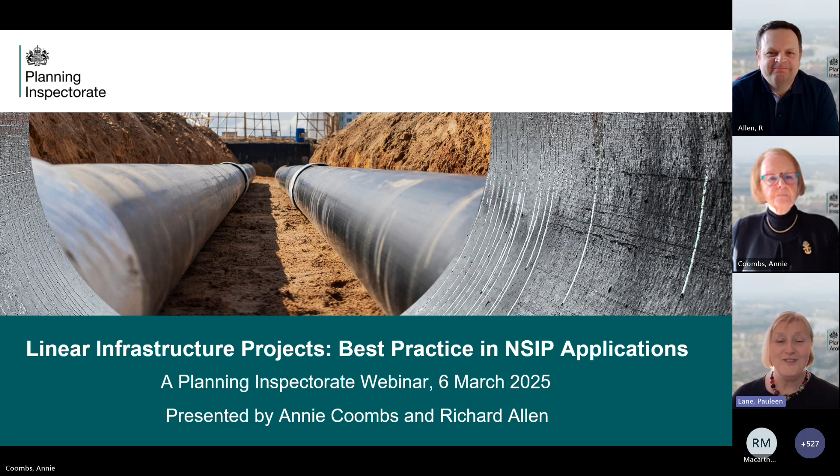I'm an examining inspector and an inspector with the Planning Inspectorate, where I deal with Section 78 appeals as well as hearings and inquiries. I primarily am focused on national infrastructure, and I have examined and made recommendations on a number of projects, including linear projects.

Hello, and I'm Annie Coombs, and likewise I've examined and supported a number of linear infrastructure projects in my role as an examining inspector. And when I think back over my career, I realised that I've worked on linear projects and linear infrastructure projects for quite a lot of the whole of my career.

So this is the agenda, and we'll just have a very short section on key messages, and then I'll talk a little bit more about the three areas that we've divided this presentation up into, and then, as Pauleen said, there'll be questions at the end.

So these key messages - we've corralled our thoughts from the advice note into these three headings, and as Pauleen said, there's more on the advice page than we've been able to cover in this, but also there's examples in this presentation that aren't in the advice page, so we're trying to widen the best practice that we're sharing with people. And in terms of the three key areas that we're emphasizing, all three relate to the fact that we're dealing with long, complex geography, which means more habitats, more people, more communities, more landscapes that these projects are going through.

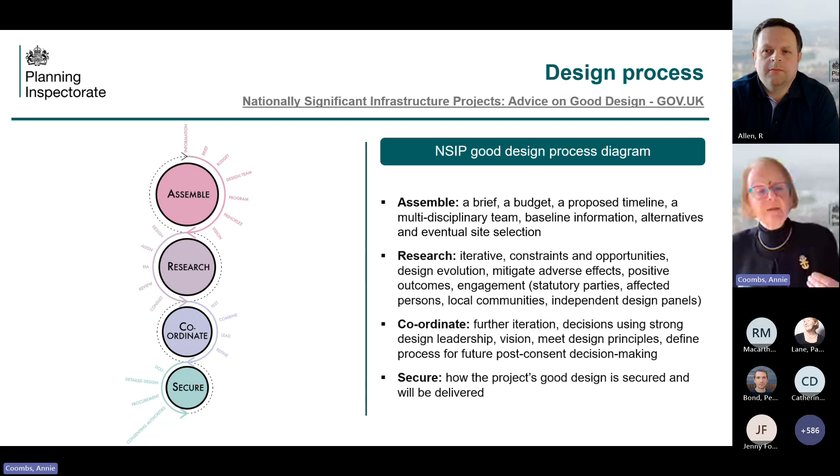It's probably fair to say we don't often see flow charts or diagrams showing the EIA and design process integration shown in that sort of flow chart way. That could be helpful to see.

In terms of likely changes coming our way, it's going to be important to be very clear about beneficial outcomes - there's a bit more on the advice page about that. For linear projects, there's potential for enhancing various networks, biodiversity networks, or public rights of way, etc.

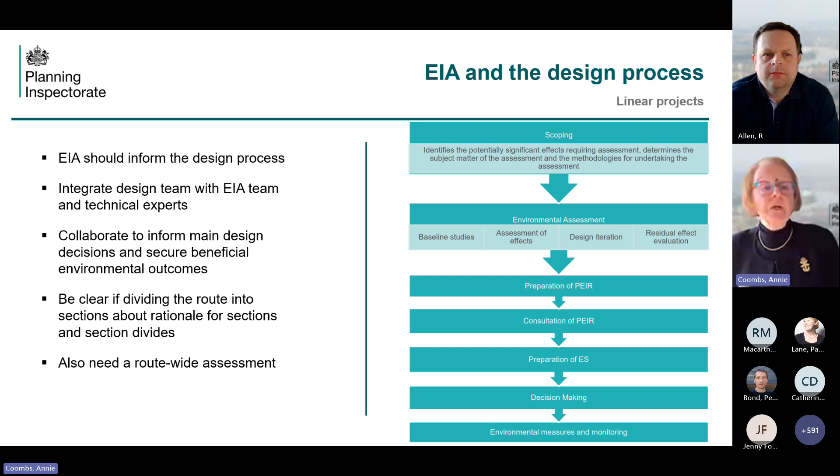In terms of the EIA and the environmental statement, quite often we see these divided into sections. If that's the case, it's important the section lines are done on a logical basis - it isn't necessarily a local authority boundary, it might be looking at national character areas, and that rationale should be presented in the environmental statement.

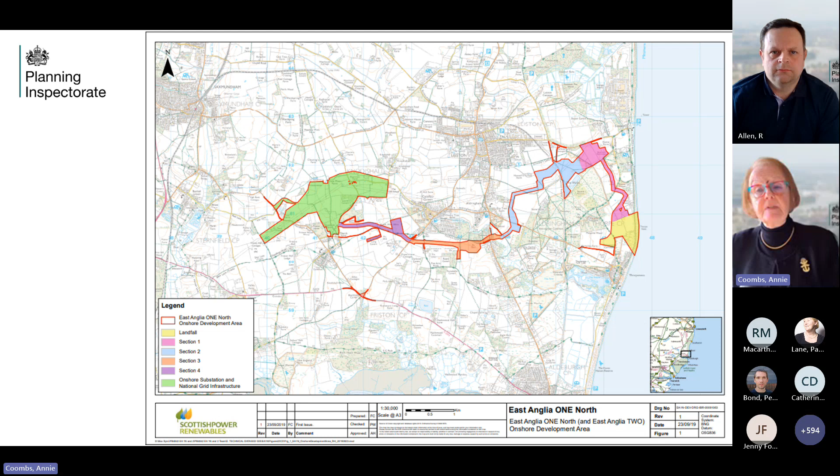But equally, it's important to give an overall assessment so that there's confidence that there are no gaps in the assessment.

So I'm going to hand over to Richard, and he's going to talk a little bit about that engaging early that we've mentioned.

Thank you. Yes, so in the next few slides we'd like to talk a little bit about pre-application engagement, and in particular emphasise the importance and benefits that early and comprehensive engagement can bring.

For a linear scheme, there are likely to be lots of local authorities, lots of landowners, lots of interested parties, lots of affected persons, statutory bodies and local bodies alike. So we would say it's really good to get good proactive engagement, and that can save considerable time when the application is examined.

The National Infrastructure Commission accepts that there will not always be agreement in schemes, particularly linear schemes, and recognises that there may be tensions. It's somewhat understandable that parties involved in linear schemes may feel pre-application discussions or constructive engagement is unnecessary, because people do object and are concerned. But actually the opposite is true. Early and continuous engagement is really important and can help alleviate some of those concerns, making for a much smoother application process and examination time.

Along the route there were 9 district and local authorities whose administrative areas this route ran through. There were 2 county councils, the South Downs National Park, the Greater London Authority, and 1 London borough. On top of that, there were over 2,000 plots of land identified in the land plans and book of reference that the applicant needed to gain powers over. This gives you the extent to which these schemes can engage the number of people involved, which presses on the importance of early consultation, giving time to reach agreements or not, as the case may be, and to identify issues that can assist the examination process.

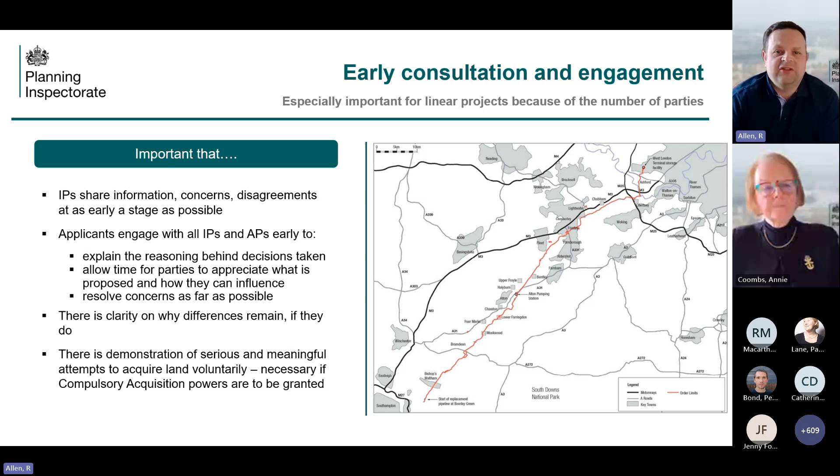There are various ways in which you can engage with authorities and the public alike, and I want to say a few words on this. I think it's important to consider the appropriate method and best illustration of what a proposed development will be and the effect it will have. You can deploy various methods through fly-throughs or models, which are always very helpful over and above the technical and engineering drawings that will be produced as part of it.

Just to go through a few examples: on a linear scheme I dealt with a number of years ago, the applicant engaged a trusted local expert, a person known and trusted by the farming community and landowners. By doing that, they gained their trust and a lot of confidence in the system and the application, making it much easier to negotiate with them.

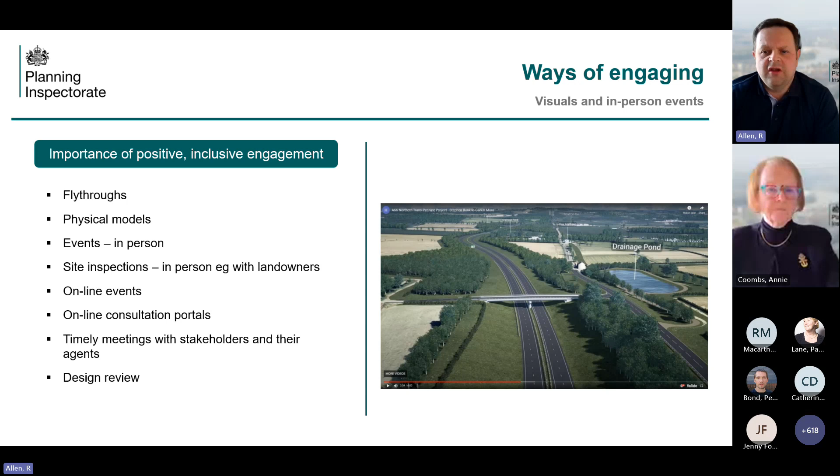On another scheme, Eggborough Power Station, which is not being built, the applicant did a fly-through of the high-pressure gas pipeline very early on, and took that to pretty much every event in the pre-application discussions and local events. It was available on screens throughout the examination, the pre-examination process, the preliminary meeting, and all the hearings we had, with a person to take members of the public and others through it so they could understand what was actually happening.

I do want to stress that one important way engagement can take place is via a really good interactive website. Again drawing on the Southampton London Pipeline experience, the applicant had given a lot of thought and put a lot of resources into an engaging website. Not only did it contain videos and fly-throughs, but it also contained an interactive map allowing users to understand where the route was going, and to put layers on the map such as constraints of conservation areas, listed buildings, or other designated sites.

You could also put your address in, and the public could see where their property is in relation to the proposed development and how they related to it. In a lot of cases, the Planning Inspectorate can reference the developer's website to help explain the proposed development. What you can see on screen was actually an explanation guide produced on how to use it—a really good example of an engaging website to help explain the proposed development.

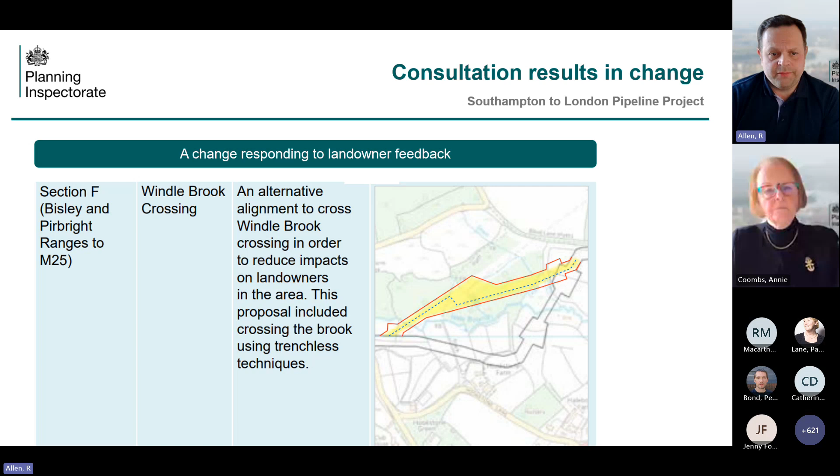And this doesn't just extend to landowners. Statutory bodies and others can also have an influence, again where there's initial concern about the proposed development taken as a whole. Through that engagement, you can really get down to where the actual concern is.

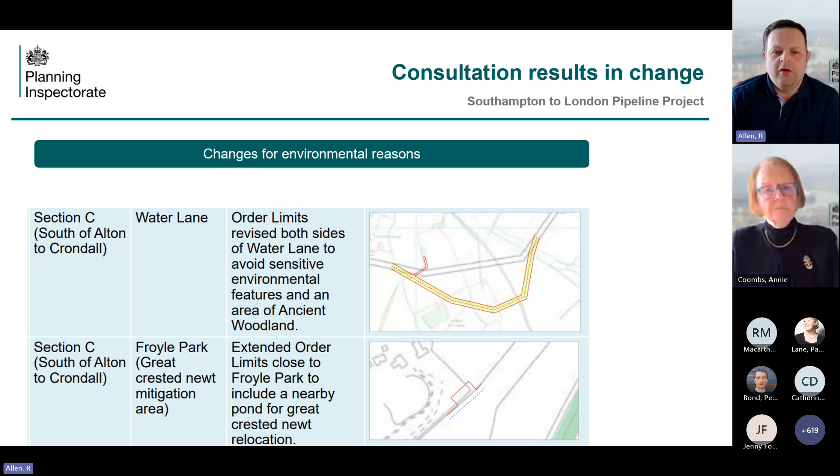In this case, a concern was raised about the effect on an ancient woodland, and the applicant was able to deviate the line away from it in the pre-application arena. Here's another example of where the line was moved as a result of those early discussions.

The local authority, again, can influence a move. Here's another example of how the route was moved over biodiversity concerns, again through a pre-application stage.

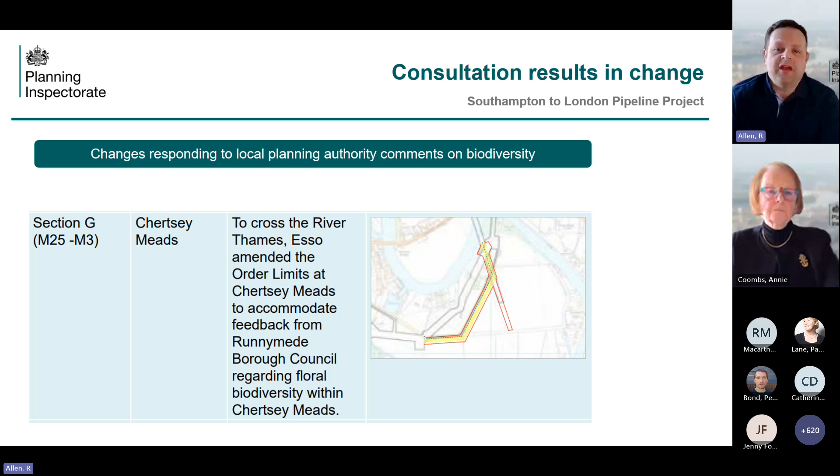The final example I want to use is on the A66, a change that the local community were able to influence. The A66 currently runs along here and along this grey line. The initial pre-application proposal was to dual various sections of the A66, and in particular, to go to the south of a settlement called Kirkby Thore and realign where it's already dualled.

But the local community were very concerned about the effect it would have on the village, particularly the area to the south, because that's where many of the historic assets were—listed buildings and scheduled monuments. So working with the community, the applicant devised a probably more costly route, but one that deviated to the north of Kirkby Thore as a result of those communications with the local community, alleviating their concern.

What these examples show is that doing it early on means the implications are less than doing it within an examination, because if you do it through an examination, things like the order limits may have to change, the book of reference may have to change, and the compulsory acquisition regulations may be engaged, all delaying an examination.

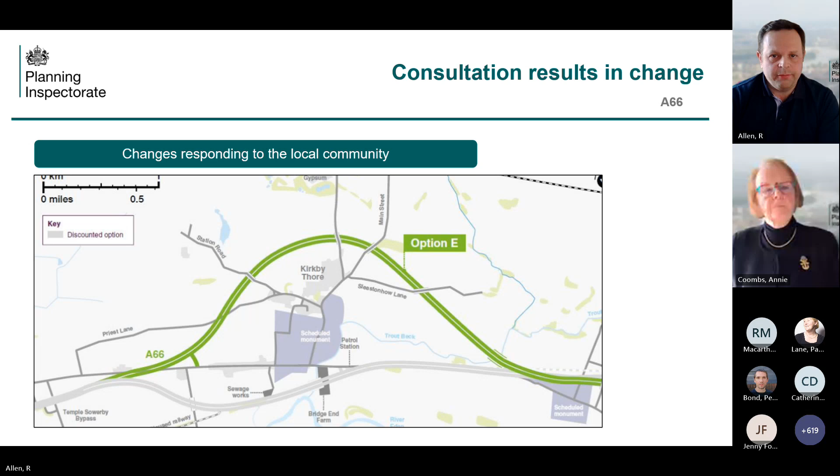It's not just larger bodies, such as the Gypsy and Traveller community, that should be considered—individual persons need to be considered as well. This same applicant arguably didn't quite show the same duty to older persons along the route, particularly a couple whose property was largely surrounded by the development, and changes had to be made during the examination in order to comply. So it's not just larger groups.

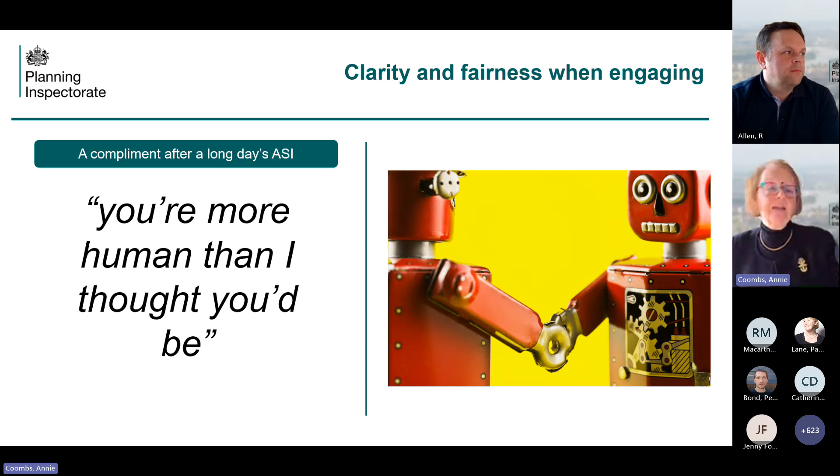They're sometimes called different things in different DCOs, but on Yorkshire Green, quite a bit of time was spent finessing the role description for the agricultural liaison officer, understanding that it was a role and not one person, because on a linear project you're likely to have activities going on at different parts of the alignment at the same time during construction. That more detailed description, secured within a document and then secured in the DCO, even led to the withdrawal of one of the farming objections.

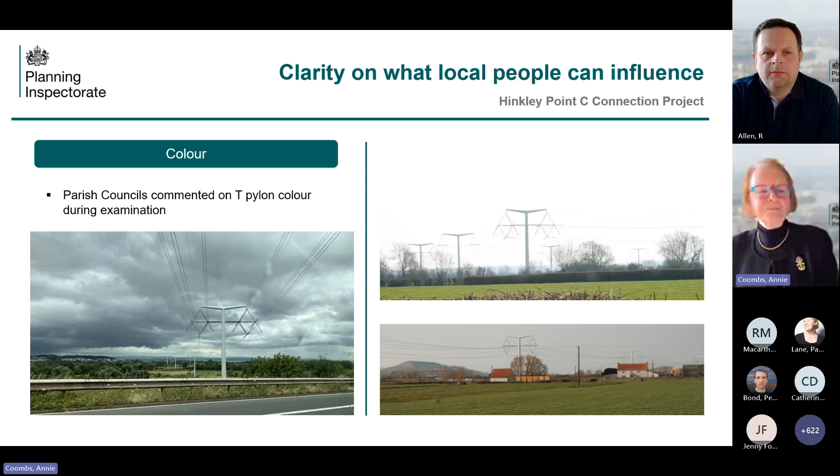All the local authorities had worked together during the pre-app stage. I think there had been a PPA to support that process, and they represented themselves in the examination as the joint councils, appointing counsel for that engagement, certainly at hearings. That was really helpful in recognising that the opinions of those councils were coming from one body. Now, that isn't always possible.

For example, on Yorkshire Green, there was a local authority reorganisation during the examination, and that hampered any potential for joint working.

But even if there isn't a bringing together of all the councils in one, it is helpful if agreements can be reached on topics that are project wide. For example, on the Yorkshire Green project, there was agreement between the various local authorities on working hours, greenbelt matters, landscape maintenance periods. So if it is feasible to bring those local authority views together, then that helps.

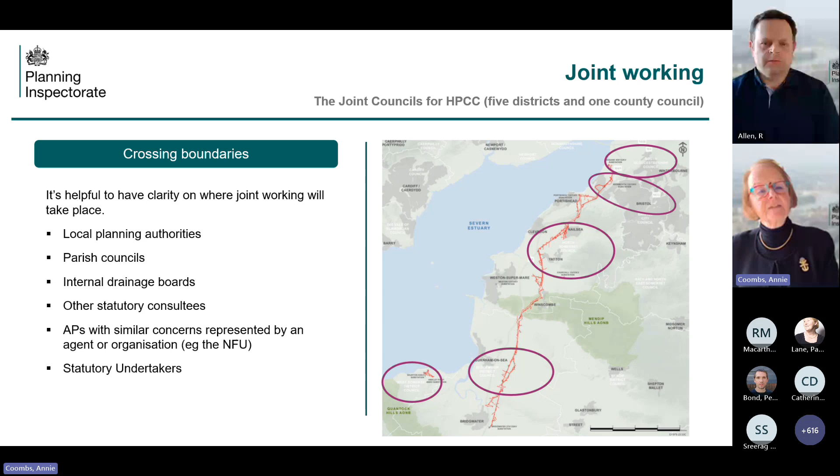We acknowledge this tracker should be proportionate to the complexity of the project. So if it's Excel or something similar for the tabulated information, it's important to discuss this at pre-application stage with the inspectorate to get a feel for how much information is needed and how many times it might need to be updated during the examination. And whilst this is stating the obvious, the more that's agreed before the application goes in, the less work for the tracker.

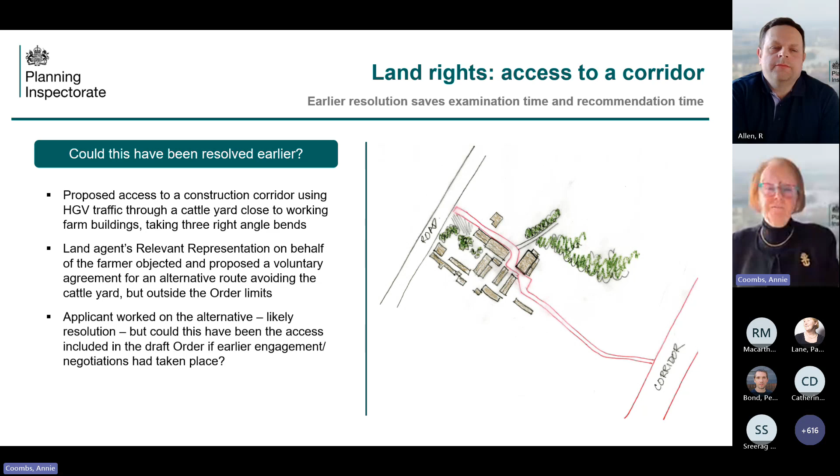The objection, which was a constructive objection really from the landowner, the farmer in this area, was basically saying: can we not look for a voluntary agreement to take a route that doesn't go through my cattle yard? We didn't see the alternative, but we were advised there were constructive discussions going on between the applicant and that farmer. But the point is that if the landowner had a better routing, perhaps that better routing could have been included in the application, and then the objection and the need to track it would have disappeared.

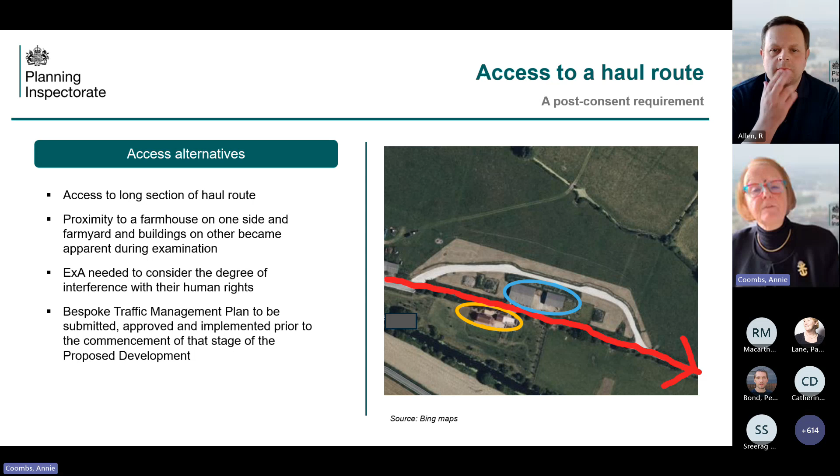And now I'm going to hand back to Richard.

Thank you, Annie. Yes, and I just want to finish this section with a couple of slides on statutory undertakers, drawing on the matters that could be resolved earlier in the process. Now, as set out at the beginning, linear schemes will very likely encounter many statutory undertakers, those providing road or rail infrastructure, water bodies, electricity and gas suppliers, to name but a few.

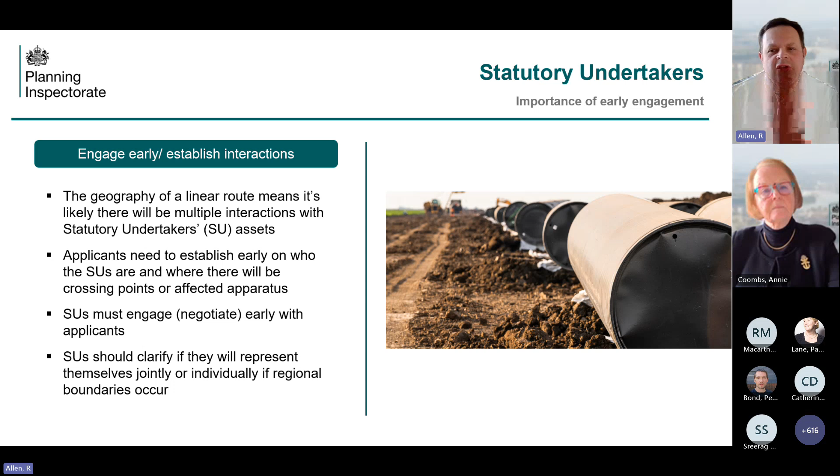And it's quite important that those statutory undertakers are identified again very early on in the process, and also what's identified is particularly what the issues are that are going to affect them, if any. Now, these are usually dealt with by protective provisions, which make up part of the development consent order that is sent to the Secretary of State. Now, applicants really should agree protective provisions as soon as possible and preferably before the examination begins.

I think there's a lot of examples where it is left to the examination stage when meaningful discussions begin on this, and it can quite often take up much of the examination time and lead to it not being particularly smooth.

Applicants will be aware, and others will be aware, that there are a number of orders now that the Secretary of State has made where they have agreed certain protective provisions for statutory undertakers in their orders. And that's really where the starting point should be, the orders that the Secretary of State has already agreed, with perhaps any specific changes or clear explanations made as to why in this case there needs to be a departure from that through an additional paragraph added in or a paragraph taken away.

Quite often in examinations, the protective provisions that are old or from years ago are the ones that are the starting point, and they really shouldn't be, and they shouldn't need to be. This is a matter that needs to be discussed much earlier in the process, and as I said, the Secretary of State has already made a number of decisions on protective provisions for linear routes, whether they be offshore wind farms or cable routes or highway schemes.

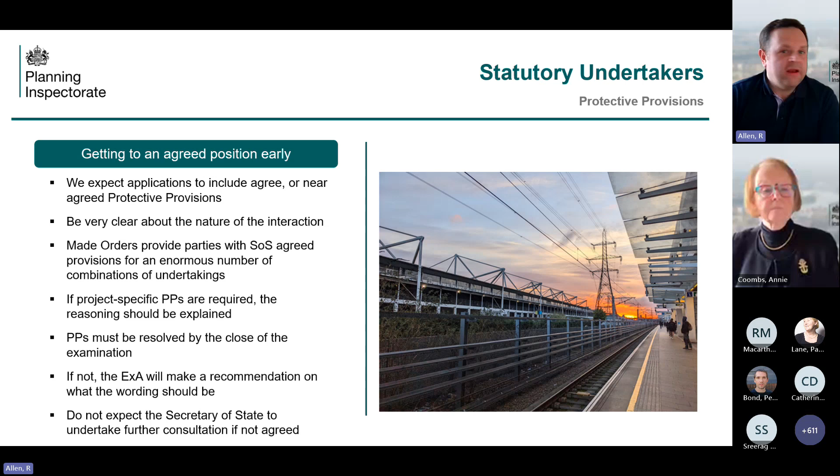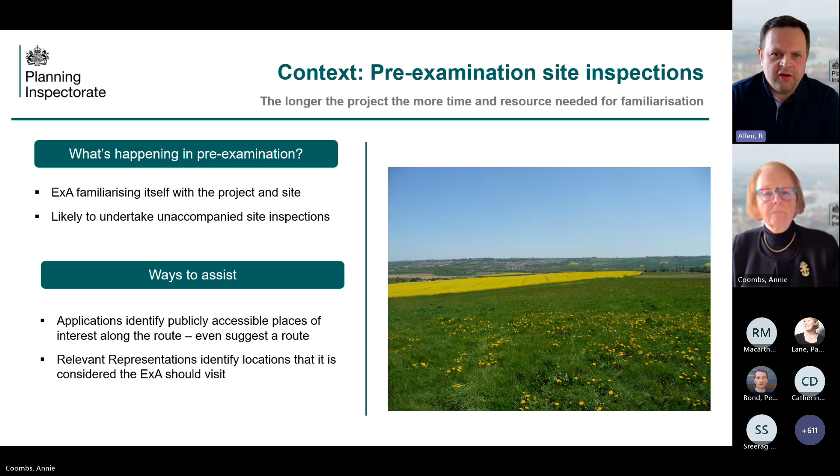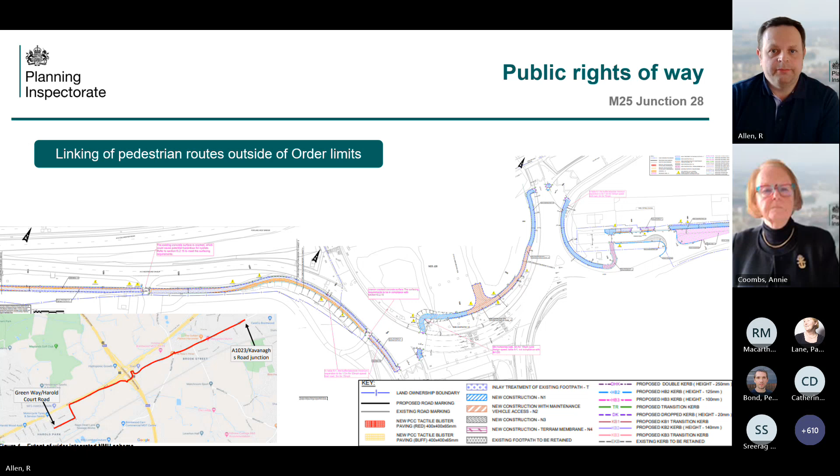So on the next few slides, I'd like to talk about the usefulness of diagrams to assist in context and understanding an application, having regard to the fact that not everybody who is involved in an NSIP is technically minded and will understand technical plans or engineering plans.

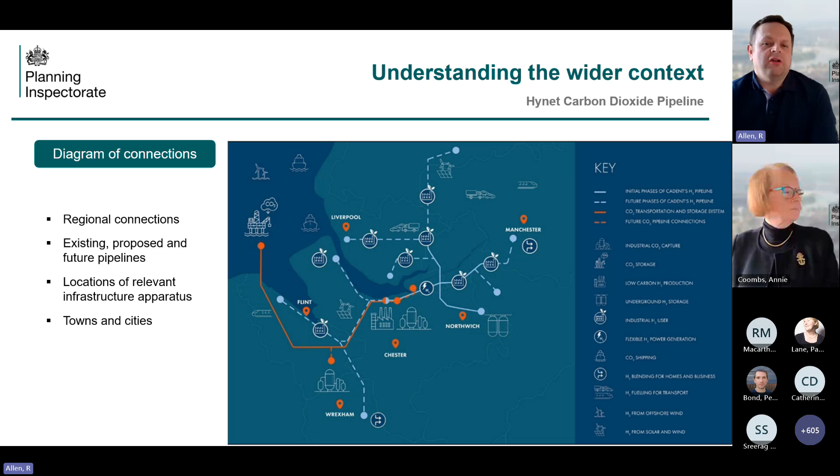Just looking at a wider context, this is taken from the HyNet carbon dioxide pipeline. The drawing shows how the scheme connected in with other projects along the way, just understanding how it fits with other schemes. The Examining Authority found this a very useful diagram in explaining that.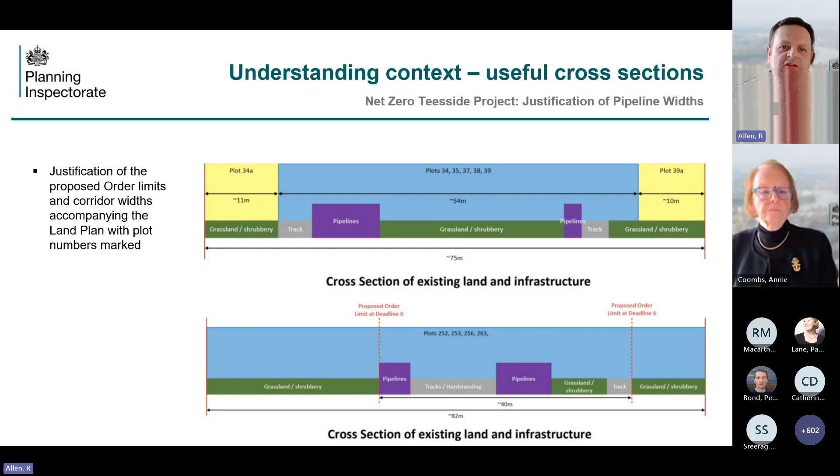And I'll hand back to Annie.

Okay Richard, we've got 10 minutes to get through the rest.

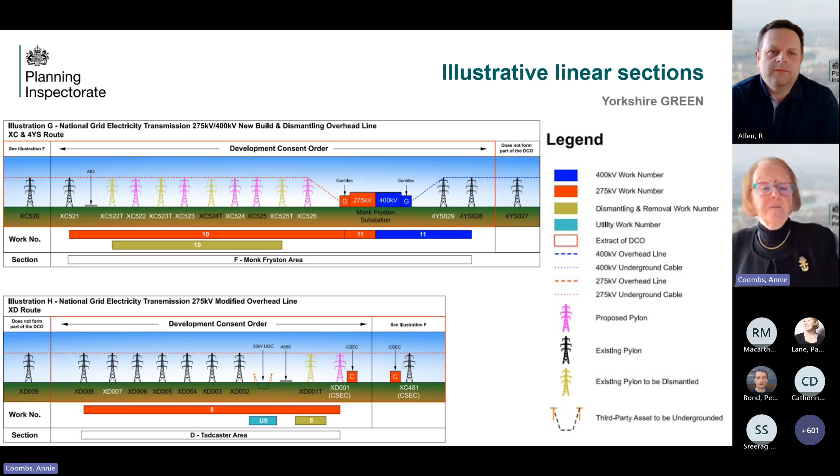Just getting a feel for the picture, you could stick them all together and have a big long line of plans, and that sort of information is helpful for Examining Authorities, but probably helpful for the consultation stage as well.

And then in terms of interactions, a linear project, the longer it is, the more likelihood of interactions with other NSIPs. One of the areas arising more frequently now is the matter of co-location of substations.

And let's hope that they don't look like that.

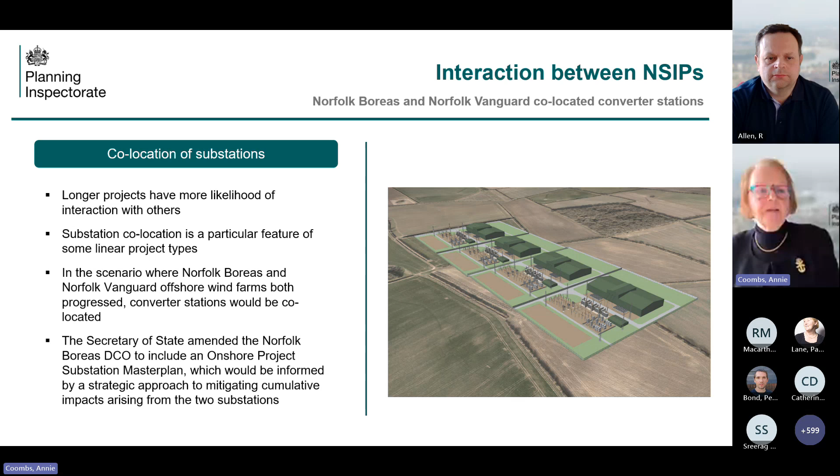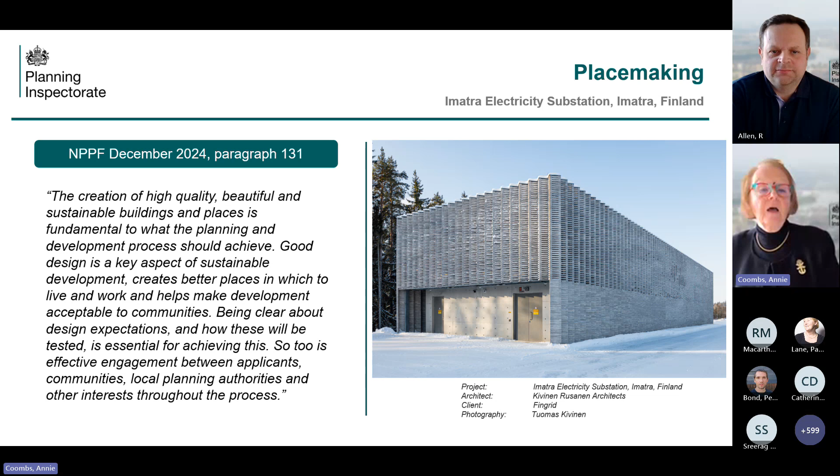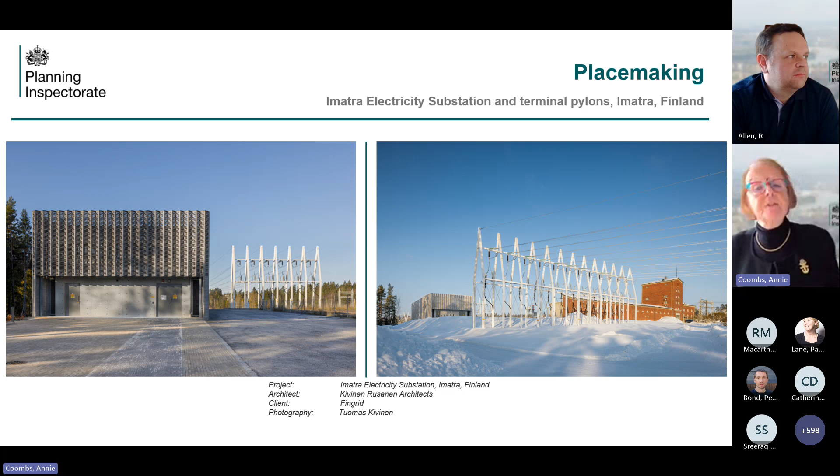I can't resist putting in a couple of slides demonstrating good design. This is a substation in Finland, recognizing what the NPPF says about high quality design. And again, that substation in Finland in context with the terminal pylons. The point isn't that this is what we should build in the UK, but that it's drawn from traditional Finnish vernacular—an example of excellent placemaking, drawing from the context and historic vernacular, replicating it in a contemporary way using contemporary materials.

Now moving on to the final section on flexibility, and Richard's going to talk to the first slide on this. Yes, thank you, and I'll try to speed up.

In this final section, we're going to look at flexibility against certainty and trying to get that balance right, recognising that the applicant will wish to have a degree of flexibility to construct complex and technically difficult projects against the need for local authorities and the public for certainty. I'll make this one very quick.

How alternatives are explained is an extremely important consideration for interested parties. Alternatives, particularly those advanced by a considerable number of interested parties, should be fully explained if they've been discounted. This is a current cause of issue in current casework, particularly one scheme in pre-exam. I cannot underplay the importance of really clear visuals and justifications for the choice of route.

Consideration should be given to how alternatives are presented in applications and explained in the environmental statements. One example could be, as we did in slide 8, to break down the route and explain it by sectionalizing it. Areas such as mini routing or measures to overcome particular challenges should be considered and explained—why they weren't able to overcome the concerns, and why a particular alternative over a wider scale was discounted. This is a very important issue for the public who look at this, and has been a big issue on a lot of cases.

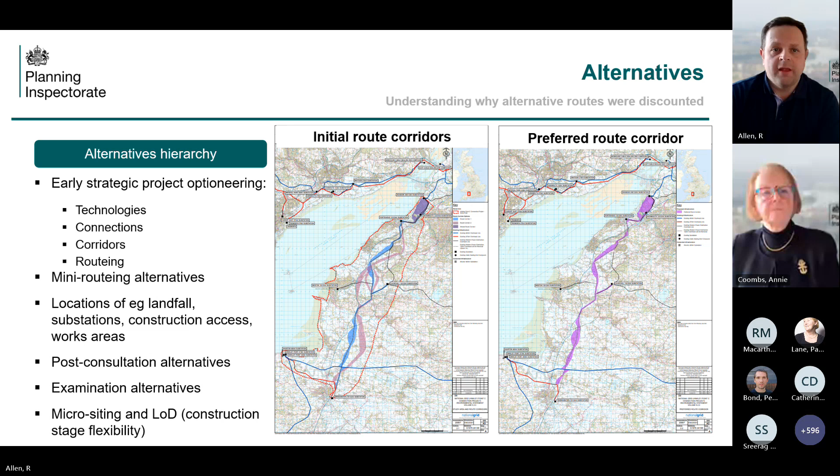Quite often local communities are very engaged about the construction stage effects that will be in their patch. On Norfolk Boreas, there was quite a lot of flexibility in the locations of mobilisation areas, and construction compounds were identified, but there was flexibility about what would go where. Having seen some of the sites and the proximity of local residents, the applicant agreed and worked up more detail for inclusion in the DCO and the Code of Construction Practice.

There were changes to add more certainty to what would happen in those areas. That included maximum footprint parameters for mobilisation areas, and layout plans to minimise adverse environmental effects on sensitive receptors needed to be approved by the local authorities prior to commencing work in that area.

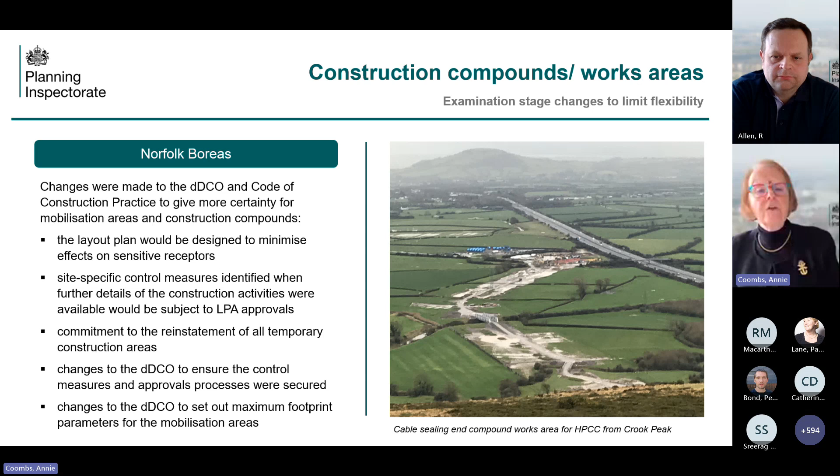Here's an example of a pipeline. This is part of the HyNet carbon dioxide pipeline, which had to cross a brook, and the applicant wanted to use a cut and cover. But Natural Resources Wales considered that this would breach the Water Framework Directive. Eventually, during examination, an alternative embedded pipe bridge crossing was put forward, and then NRW removed its objection.

The point here is these sort of changes that occur during the examination. If these discussions can take place earlier in the pre-app stage, then the examination time doesn't need to be taken up with dealing with these matters. That's all in the interests of expediency for examination and reporting, and equally decision time if things are left for the Secretary of State, which our objective more and more is to leave less for the Secretary of State to consider or consult on.

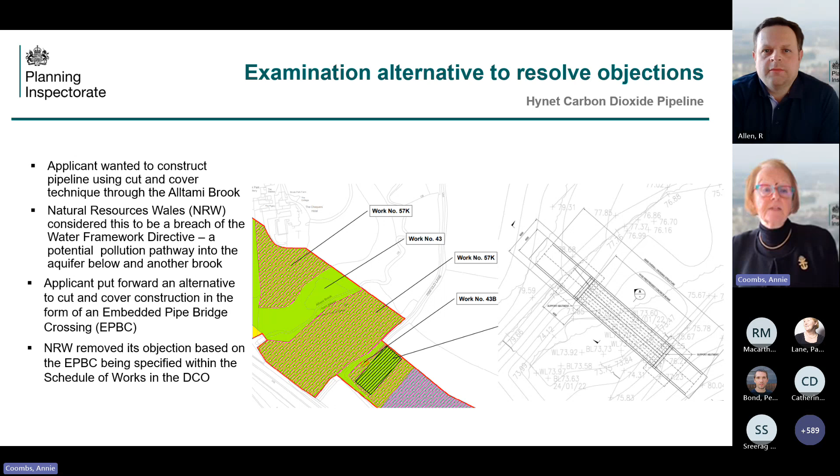Here's an example really showing the importance of limits of deviation, where the ExA forgot about the importance of limits of deviation when it made a change in the recommended DCO. So we're considering pylon LD32, which is here. You can see from the turquoise line that the red line is within the order limits. It had already shifted a little bit to the west, and there was very extensive engagement by the owners and occupiers of this farmhouse about the position with respect to their garden, and we had to consider the overbearing presence of the pylon on those residents.

The applicant was very helpful in illustrating for us the different effects of moving that pylon a little bit further north or a long way further north. We took the view, the ExA took the view, that the pylon would be moved 40 meters to the north, and that's how it was written into the DCO.

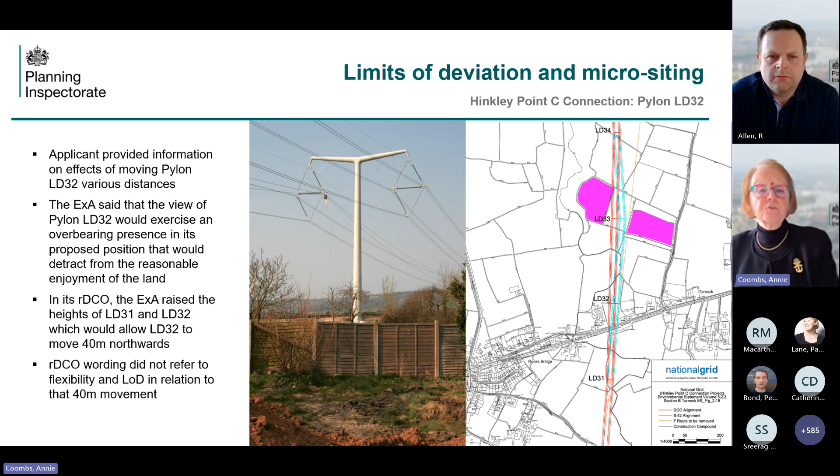Unfortunately, when the undertaker came to construct, the land at that particular point, 40 meters north, wasn't suitable for geotechnical reasons to construct the pylon, so the applicant needed more flexibility. Because of the way the recommended DCO had been written, a correction order was needed, so the applicant had to go back to the Secretary of State to get that plus or minus 5 meters northwards. I think we've all learned from that - it shows that ExAs don't always get it right either.

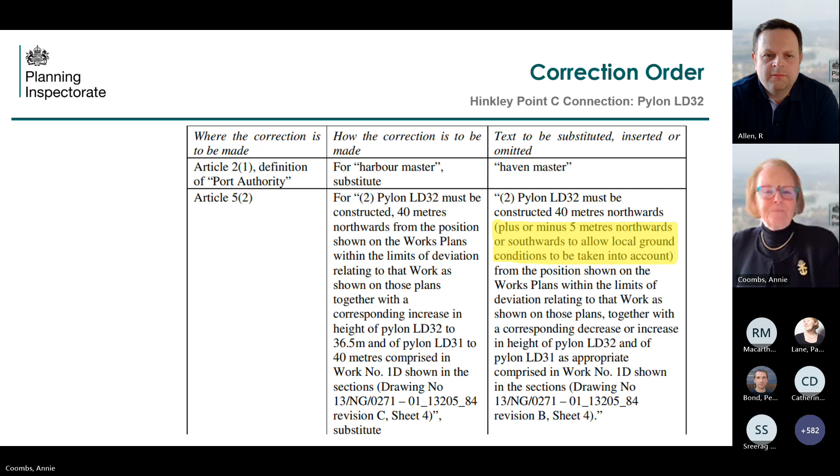And then options, just a very short bit on options. So I think probably the penultimate points are that options take more examination time, so why wait if it can be agreed prior to the application? And if so, then there's real clarity needed on who decides and when.

So the photograph is the second day of a 2-day hearing on the options for the Hinkley connector, and the options are in the advice note. There's a lot more about the type of options that can be included, such as routing for the corridor or for substation types.

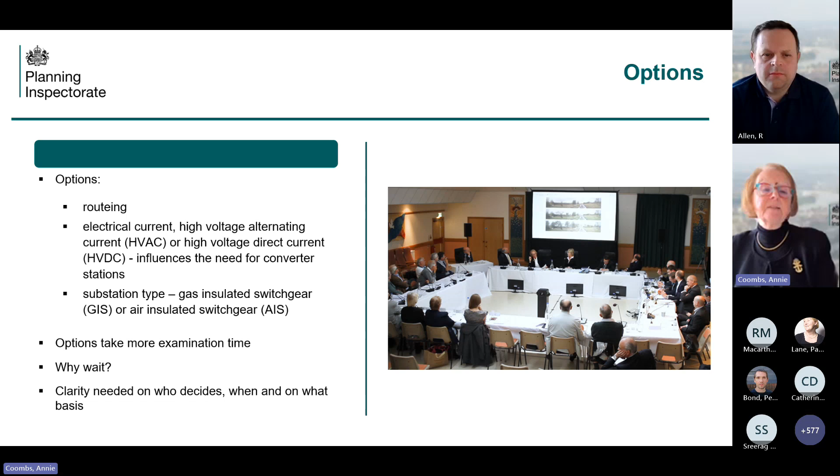I think it's just a discussion point for pre-application discussion about whether it's appropriate to be including options. Sometimes we recognise that the applicant needs the options to stay within the DCO, but it does mean definitely more examination time and potentially more post-consent time in terms of local authority or other organisations for post-consent approvals.

And this is, I think, my final slide. So just in terms of the flexibility, it's really important to know what that flexibility is based on and what it would look like, and what could be built within the parameters that are set. So you might get that flexibility described in design approach documents, parameter plans, construction environmental management plans. But the importance of the worst case scenario - and also whether the worst case scenario is actually ever going to be built.

So this is a visualization of a new substation, and the infrastructure assets there are what was described as the most likely engineering scenario. But what had been assessed was the purple dotted line, which was the Rochdale envelope, and so potentially a lot more could be built. So just the importance of having that clarity, and the importance of reducing those Rochdale envelopes on occasion, if possible.

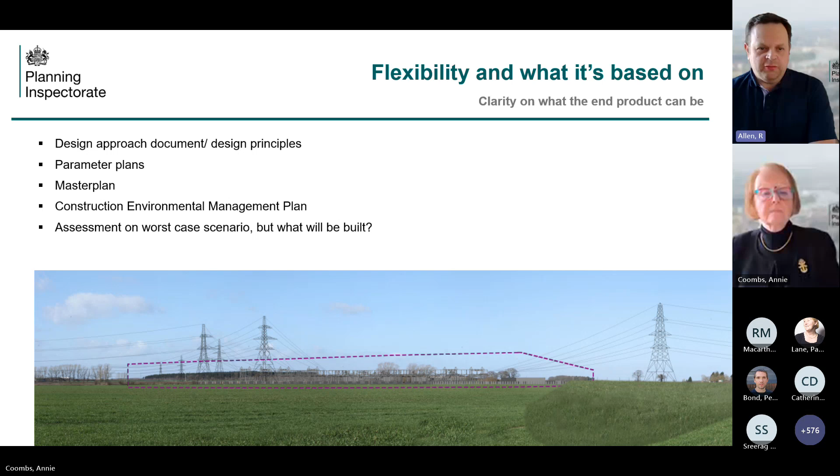And I think I'm handing back to Richard now. Yes, thank you. I've just got a few words on the balance set out at the outset between flexibility and certainty.

Drawing from the Southampton to London pipeline along a linear route, much of the land for the cable route was alongside open countryside, farmland, some distance from residential properties and roads. In these locations, it may be appropriate to leave the detailed construction methods to the detailed design stage, when applicants have sought to go into much more detail. The difficulty lies when applicants and others assume that to be true for the whole of the linear route - understanding the landscape and the land needs to be a lot clearer.

In this location, I think it's fair to say that early in the examination the applicant really didn't understand this area or how they were going to construct it, relying again on a 'we'll deal with that later' viewpoint. We would say that's simply not appropriate for these sensitive areas, and that applicants and others should identify certain areas where they need to take a more detailed and certain approach.